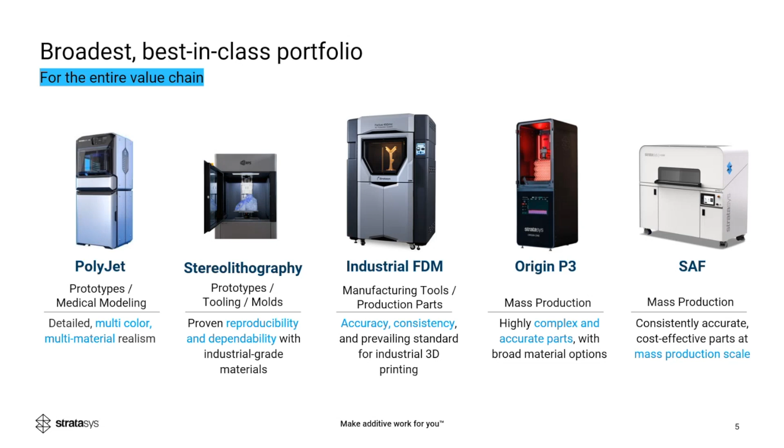Thank you, Carrie. And now we'll begin the presentation on FDM technology and materials. Stratasys offers the broadest and best-in-class portfolio for additive technologies, including PolyJet, stereolithography, industrial FDM, Origin P3, and SAF. With this wide variety of different additive manufacturing technologies, Stratasys can provide solutions for all your additive needs.

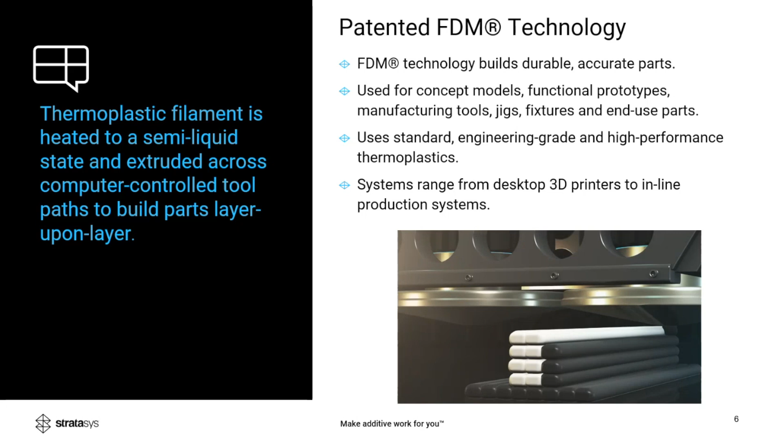Focusing on Stratasys patented FDM technology, FDM is the process of laying down thermoplastic filaments layer by layer to build a functional part. It can build everything from concept models, functional prototypes, manufacturing tools, jigs, fixtures, and end-use parts for various applications. It is capable of using standard engineering grade and high-performance thermoplastics. And with the FDM technology, printers range from your desktop models all the way up through your heavy industrial F900 system.

Looking beyond the printer, Stratasys offers a complete solution, including the hardware, software, and materials needed to produce the parts that customers need. Focusing on the materials themselves, Stratasys offers three tiers of options, including a preferred, validated, and open material model. The preferred materials are the most advanced and complete materials that have been tuned to maximize both the performance of the material and surface finish of the parts, along with part accuracy and repeatability.

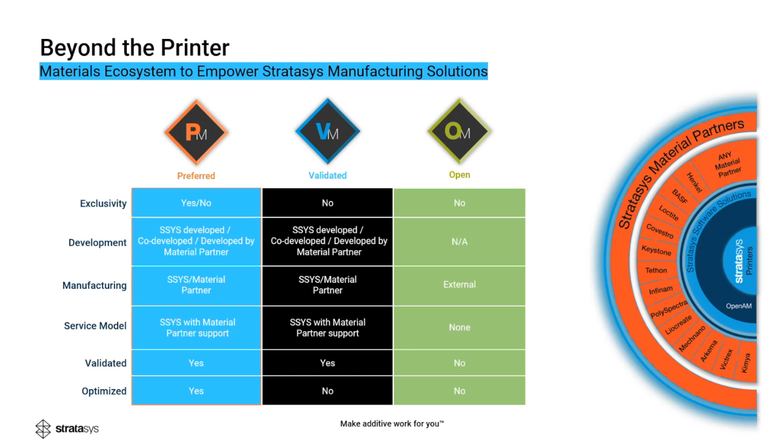Validated materials are produced to the same Stratasys standards with manufacturing of the filament and tuned to the same extent as a preferred material, but the amount of validation work and data that is provided on these materials is slightly less than that of a preferred material. With the open materials, this allows customers to utilize non-Stratasys products to either integrate and tune those materials for use on Stratasys printers, or to modify existing parameters for either preferred or validated materials to maximize performance for the specific application that they are looking at using it for.

Within the Stratasys portfolio, we have a wide range of various product offerings, including thermoplastic elastomers with our TPU 92A, standard polymers including ABS, ASA and ABS-ESD7, along with a variety of colors. As a validated material, we do also offer HIPS, which is a high-impact polystyrene. Within our engineering grade polymers, we have a variety of different nylons, including Nylon 12, Nylon 6 and Diran, along with polycarbonate offerings and lightly filled ABS-CF10 and Nylon-CF10. For flame retardant material, we do offer Kimya PC-FR through our partnership with Kimya, along with a variety of colors for our PC and PC-ABS options.

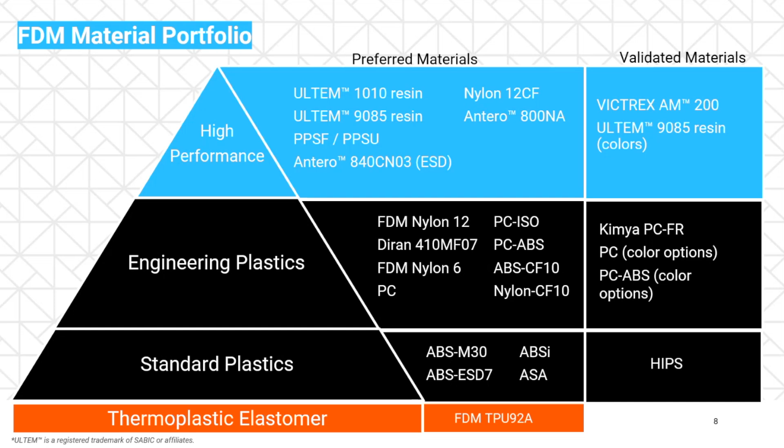In our high performance materials, which is where we'll be focusing on for this presentation, we have two ULTEM resins that we offer, including ULTEM 1010 and ULTEM 9085. Two different Antero formulations, the 800NA, which is just a straight neat formulation, along with our Antero 840CN03, which is an ESD formulation. We also offer a filled nylon and PPSU. We have a new material through our partnership with Victrex, Victrex AM 200, which is a PEEK material that is now available on both the 450MC and F900, along with a variety of colors for our ULTEM 9085, including some industry-specific colors, along with red as a tooling material.

When talking about our high-performance materials, those are available on 2 of our platforms, the Fortus 450MC and the F900. Both of these printers are industrial capable printers, with the Fortus 450 being the smaller build size at 16 by 14 inches square and able to print up to 16 inches high, while the F900 is a much bigger build platform at 36 by 24 inches with a 36-inch vertical print capability.

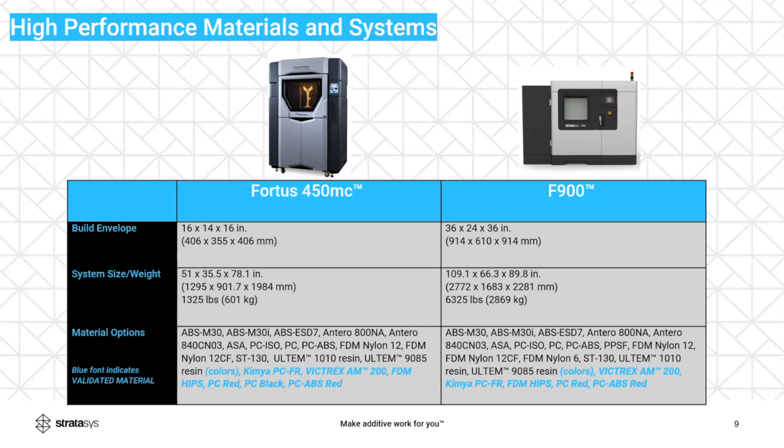Starting with Ultem 9085 resin from SABIC, this material is a high-performance PEI blended material that is commonly used in the aerospace, automotive, military industries. It is FST rated for flammability, so it is capable of being used in commercial aircraft. It has a very high strength to weight ratio, high heat deflection temperature, and we do offer 2 grades of this material.

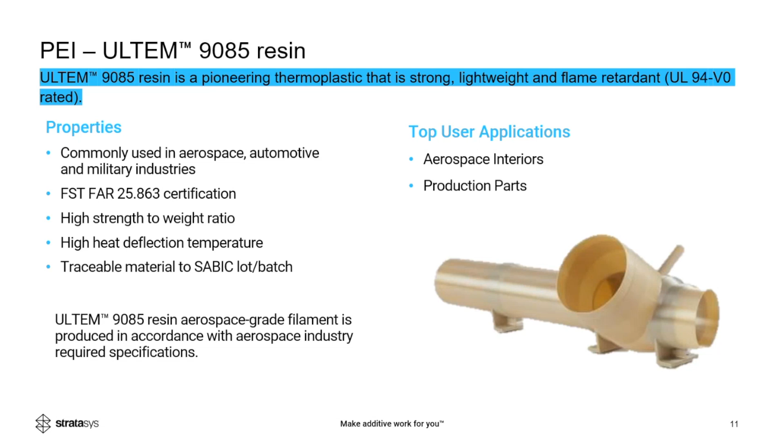We offer our standard Ultem 9085 resin, but we also offer a CG version, which does come with full traceability of the raw material and filament production for use in aerospace and other commercial applications. Typical applications for this product are aerospace interiors and various other production parts for a variety of industries.

Looking at some use case examples for this product, Airbus is a strong user of the Ultem 9085 material for various interior applications within their Airbus fleet of aircraft, including the A310, where they were able to produce a crew seat component. This was used for spare parts and replacement parts for damaged components within the aircraft. Airbus has produced more than 1,000 FDM components that filled missed part production needs for the initial A350 deliveries.

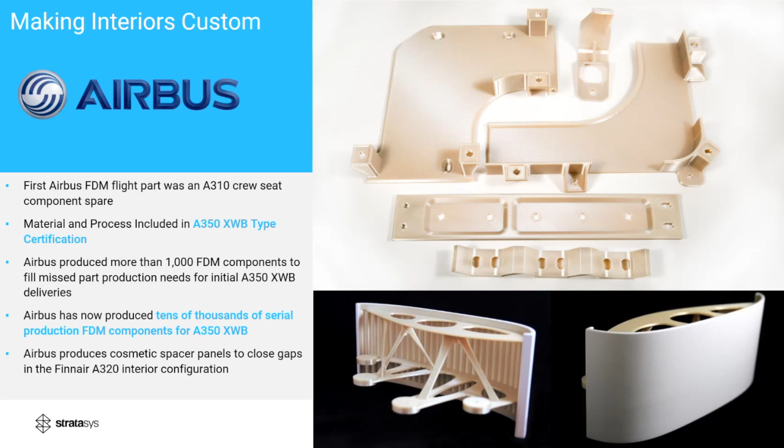They are currently flying tens of thousands of serial production parts across their fleet of aircraft, along with using a variety of spare parts and replacement parts made from FDM technology to keep their aircraft in the air and reducing replacement part costs. Here's a few examples of parts that are installed on the A350 by Airbus. These parts were produced by Diehl Aviation.

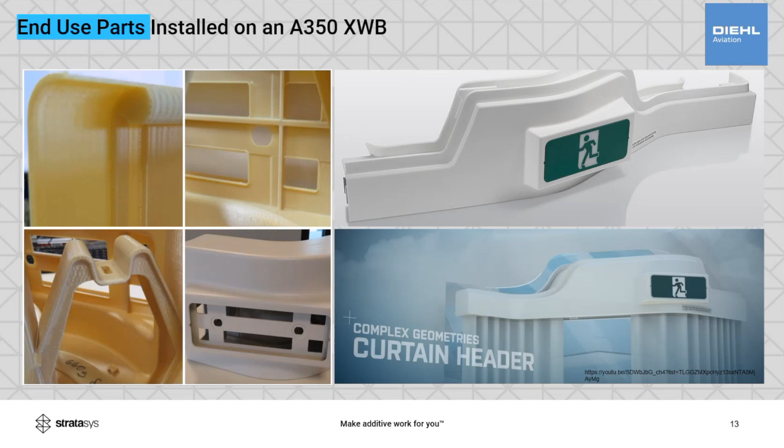One of the primary parts is this screen guide that sits between the various cabins within the passenger space of the aircraft. This is a common part that does get damaged and needs replacement. They're able to produce it using the Fortus F900 with the Ultem 9085 material to come up with a much lower cost replacement part that they can produce quickly on demand to meet their service needs.

Here's an additional example of a component made by the Italian Space Agency. This component is a housing for electronics fixture that is housed on the outside of a telescope. Being able to produce this custom component using the FDM technology in 9085 significantly decreased their design timelines and was able to replace what was metal parts and aluminum parts with polymer parts, reducing weight on the finished components. This component is used to house various electronic sensors, switches, and other connectors.

The reason that they were able to choose the Ultem 9085 is due to its FST rating, the fact that it has very, very low outgassing and would not impact other components within the telescope or the spacecraft. It's strong enough to survive the launch loads that occur at the time of launch of the rockets. One of the added benefits of using the Ultem 9085 is that it's thermally insulated, which reduces the risk of accidental touching by astronauts, while the components can become very hot while in direct sunlight.

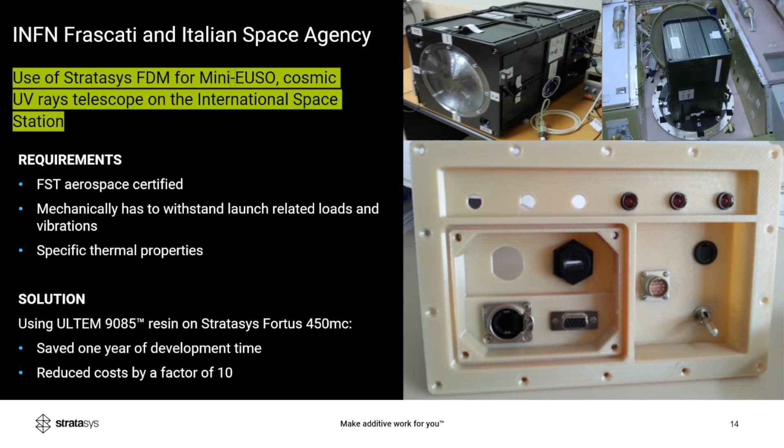When talking about the CG grade of Ultem 9085 in our AIS package, which was an initiative undertaken in collaboration with America Makes, NIAR, and the industry to develop a data set that projected the repeatability and reliability of FDM and the utilization of the Ultem 9085 material. With the AIS package, customers would get a T16A tip. This tip was specifically designed and tuned to optimize the performance of Ultem 9085 within the Stratasys F900.

It provides the end user with a very low coefficient of variance, very repeatable, and the most optimized strength with the material. It also comes with full traceability and certificate of analysis on the filament and raw materials, along with onsite training and documentation to maintain your systems over time to make sure that you do not see any change in performance.

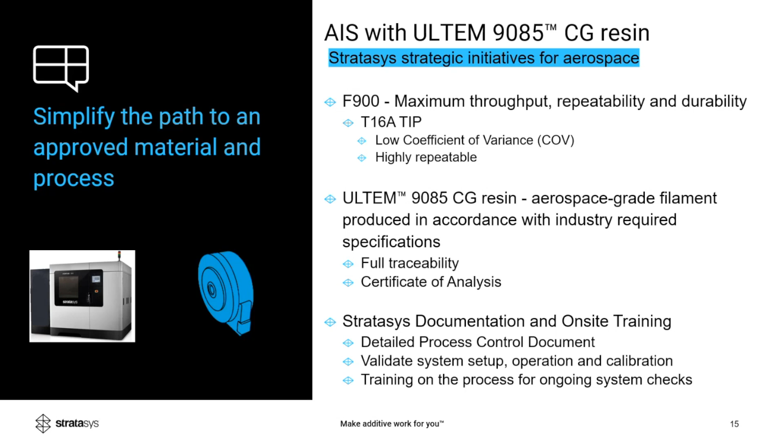Through the development of the AIS offering, Stratasys was able to fine-tune the performance of the material within the system, which provided a much higher strength capability for the material, along with significantly reducing the standard deviation of the tested components. This offers a very consistent, repeatable end use part for the customers that they are able to design to and have full confidence that whatever they print will meet those requirements.

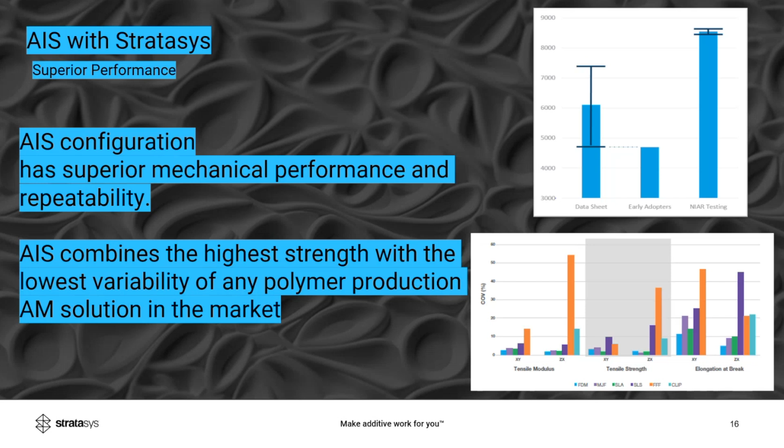The graph on the lower right, we can see a comparison of the COV of some other additive technologies comparing FDM, which is in the light blue, to MJF, SLA, SLS, other non-Stratasys FFF printers as well. As you can see from the chart on the left, this solution, combined with the Ultem 9085 filament, does provide the lowest coefficient of variance and the most repeatable process.

Looking at Ultem 1010 resin, also from SABIC, this is a high temperature PEI thermoplastic that is capable of reaching HDTs of 216 degrees C. This material is very commonly used for composite layup tooling that is able to produce very complex shapes for customers to utilize in their composite layups. It really reduces the cost of producing these toolings through traditional manufacturing needs. But the F900 is also able to produce very large tooling, limiting the number of segments that need to be bonded together to create the tools.

The Ultem 1010 material can also be used for a variety of production parts, as it does offer very high strength and very good chemical resistance. Typical industries that are utilizing Ultem 1010 today include the aerospace, space, and industrial manufacturing segments.

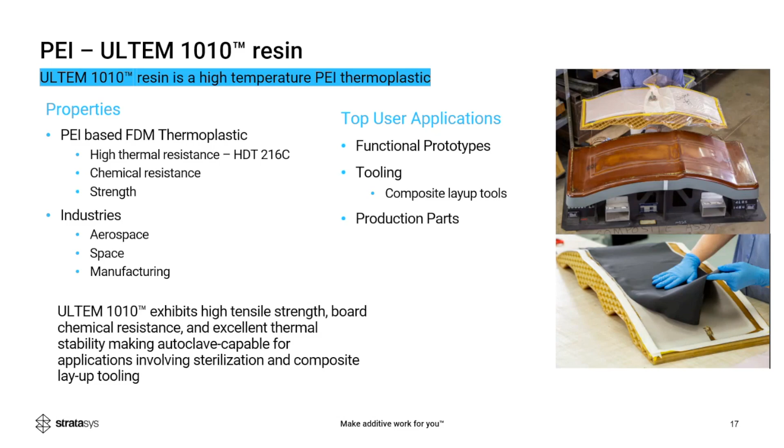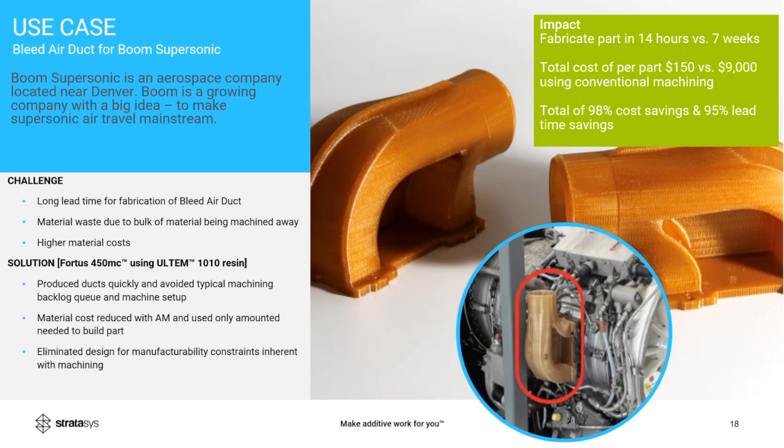An example use case for the Ultem 1010 is with Boom Supersonic. Boom Supersonic is a startup aerospace company that is looking to produce a supersonic commercial airliner, building the aircraft from the ground up. They utilized Ultem 1010 on a variety of different components, especially in their testing and development phases. Ultem 1010 was a great selection for this use case as a bleed air duct because of its high temperature resistance and its very limited thermal expansion. In doing this, they were able to save several weeks in fabrication time and reduce the prototyping cost substantially, leading to a 98% cost savings and a 95% lead time savings on this one part.

Another example use case for the Ultem 1010 is from UTC Aerospace. They build a number of large and critical assemblies for global leaders in commercial and military aircraft. These various ducts and assemblies can be very complex and usually are derived from several different parts in an assembly process. The challenge here was to build a structural component and reduce both the cost and time to market compared to a CNC machined part.

They were able to optimize productivity and find a material with the same strength and heat resistance as the metal that they were using. Ultem 1010 provided this due to its high HDT capabilities, its good chemical resistance, and its strength to weight ratio. Again, this provided a very strong time savings of 95% on the part and cost savings of 63%.

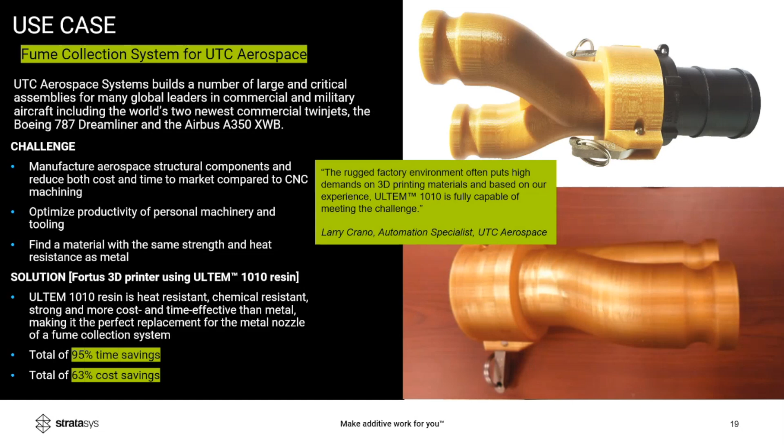Switching gears from our Ultem materials to our Antero family materials, our Antero 800NA is a PEI PEKK blend that is specifically formulated by Stratasys for use in FDM. It provides very high chemical resistance, very good temperature resistance, very low outgassing. It is FST rated for flammability and use in commercial aircraft. It's predominantly used today by the aircraft, automotive, and defense industries. It is a high performance material capable of producing a variety of ductings, housings, brackets, electrical connectors, along with some manufacturing jigs and fixtures and tooling.

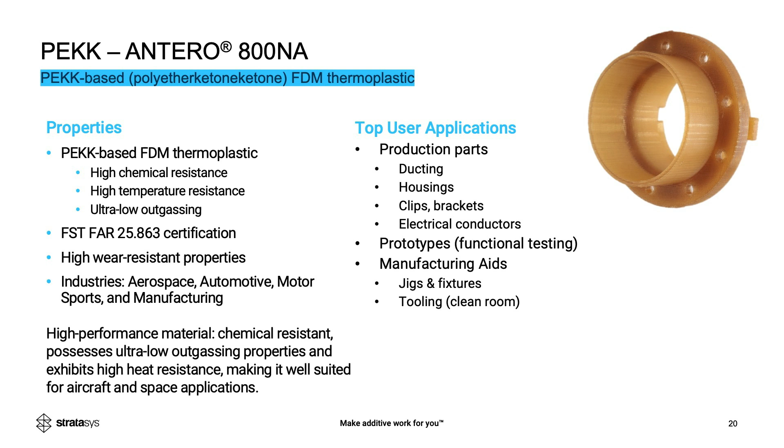Along with our Antero 800NA, we also offer Antero 840CN03. This is the same base formulation of our PEKK Antero product with carbon nanotubes that allow it to meet ESD compliance. So along with all the advantages of our Antero product, you're able to utilize this for a variety of electronic housings, tooling, functional prototypes, test fixtures. It provides very strong, very high temperature, chemical resistance with low outgassing, along with exceptional wear properties and an ESD compliant formulation.

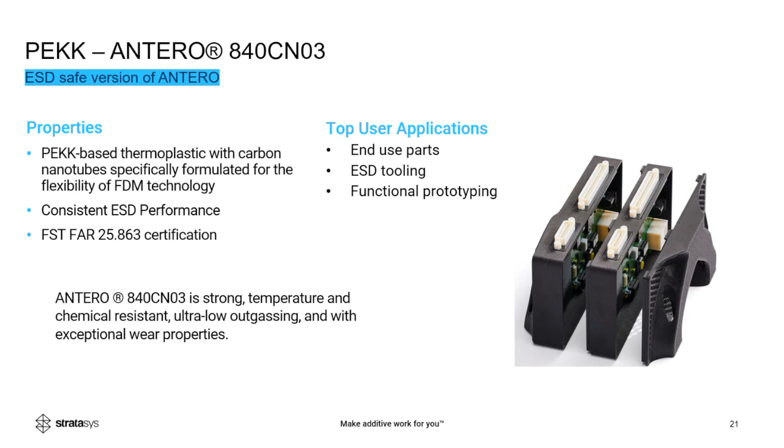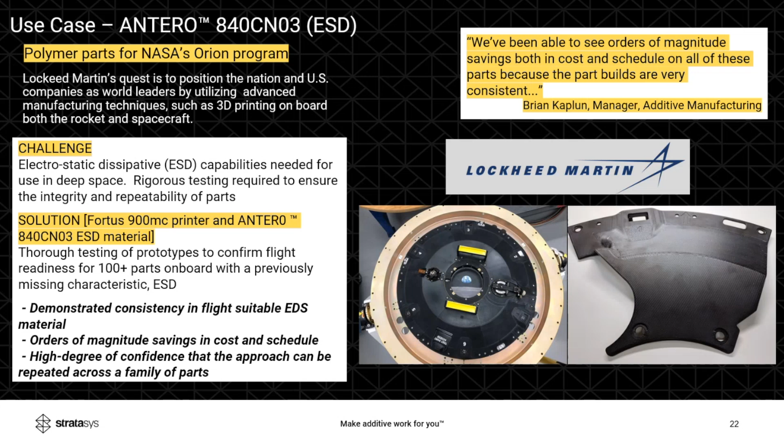An example use case for the Antero 840CN03 is from Lockheed Martin Space, where they use this material to produce the outer skin of the hatch on the Orion capsule as part of their space program. They chose this material as it had been able to demonstrate consistent ESD performance, even in the harsh environments of space. They were able to certify over 100 different parts used on board the Orion program.

The second use case example for the Antero 840 is from Liberty Electronics. The challenge here was to be able to produce an ESD compatible fixture that could withstand the high temperatures and cure cycles.

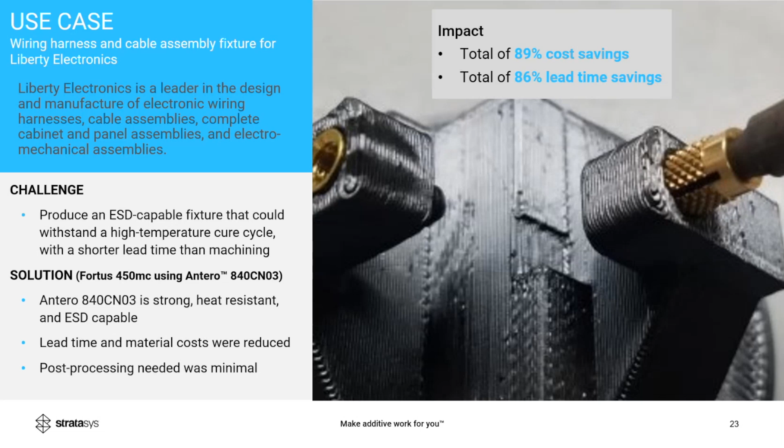The solution was to utilize the Antero 840CN03 material on the Fortus 450, and in doing so, they were able to reduce their part cost by 89% and their total lead times by 86%, providing a substantial savings on this one component.

Moving on to our final high performance material for today, we'll talk about the VICTREX AM 200. This is a new product just launched by Stratasys in May, so 1 month ago. With the VICTREX AM 200, this is a PEEK material. It is the first PEEK material that Stratasys has introduced. It provides excellent chemical resistance, excellent thermal performance, very good fatigue, wear, and chemical performance as well, as you would expect from a PEEK material. It is capable of meeting FST flammability requirements. It has very low outgassing. The industries we're looking at utilizing for this material include the aerospace, oil and gas, and industrial applications.

The AM200 material is printed as an amorphous part. It is capable of being annealed to fully crystallize the material to gain even greater chemical and thermal resistance. And one of the key features of the AM200 is that it is compatible with both soluble and breakaway support. It is the only high performance material available with soluble support.

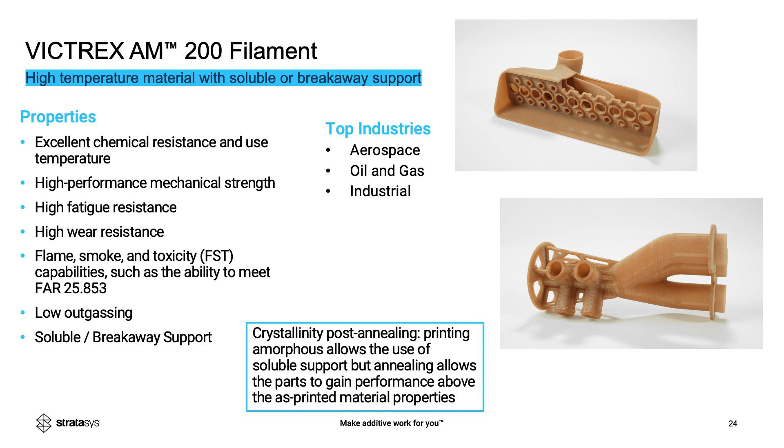Working with VICTREX produced a PEEK copolymer specifically formulated for use in additive manufacturing. The reason that VICTREX set out to develop this polymer is traditional or conventional PEEK materials have very fast crystallinity rates that lead to very poor interlayer adhesion, warping and curling, and delamination within the prints. So through the work, they were able to slow the crystallinity rate while still maintaining a PEEK chemistry.

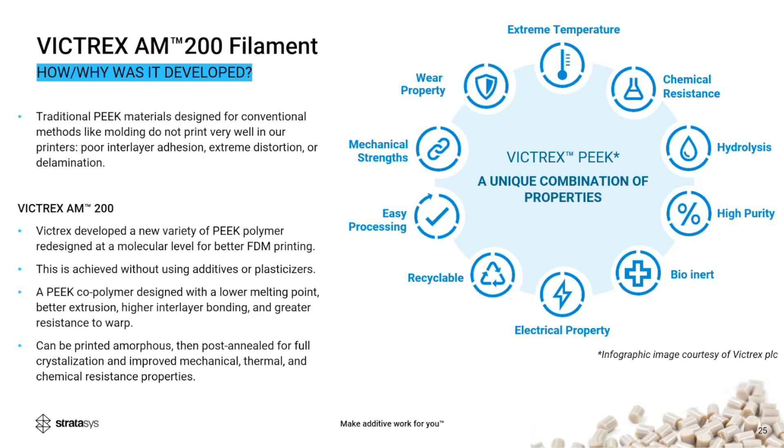This offers the ability to print using the VICTREX AM200 in an FDM process and achieve very good interlayer bonding, high mechanical performance, while maintaining all the chemical resistance and thermal performance you would expect from a PEEK material. The material is printed as amorphous and can be post-print annealed to gain the full crystallinity for the material.

When comparing the high performance materials within Stratasys portfolio, it is important to look at the real cost per part utilizing these different products. As you can see from this example part, this manifold part being exhibited, produced out of either Ultem 9085, the VICTREX AM200, or our Antero 800NA. So these materials all have a different list price. There are key benefits to take away from each one of them, both in the material cost, the support costs, and then the final cost per part, keeping in mind that the final cost per part does include the time necessary for post-processing, whether that's through tanking with a soluble support or through manual removal of a breakaway support.

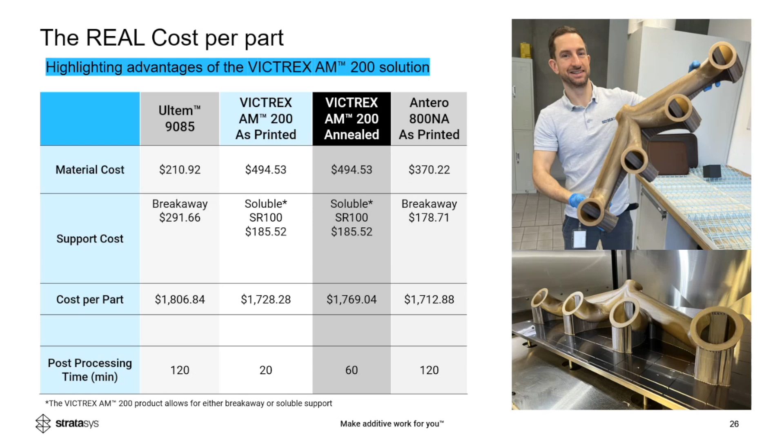So with all these various high-performance materials offered by Stratasys, how, as a customer, do you decide which product is right for your application? When looking at your application and trying to determine which material best fits your needs, there's a few criteria that can help you to sort through your various options. Looking at your temperature requirements, if your temperature requirements are above, say, 150 degrees Celsius, you're really looking at Ultem 1010 or the annealed version of the VICTREX AM200, as those two materials are capable of working in those higher temperature environments. When you're looking at primarily chemical resistance while still needing a high temperature environment, the Antero products, either the 800NA or 840CN03, along with the VICTREX AM200, are going to give you your best results.

If your applications require full traceability, including raw materials and filament for use in certified applications, you're going to look for the Antero products or the Ultem 9085 CG. If your primary target is higher mechanical strength, your best options are going to be with your Antero 800NA or Antero 840CN03, along with the Ultem 9085 CG. And if your specific geometry does require utilization of the soluble support, VICTREX AM200 is your solution, as it is our only high-performance material currently available with a soluble support.